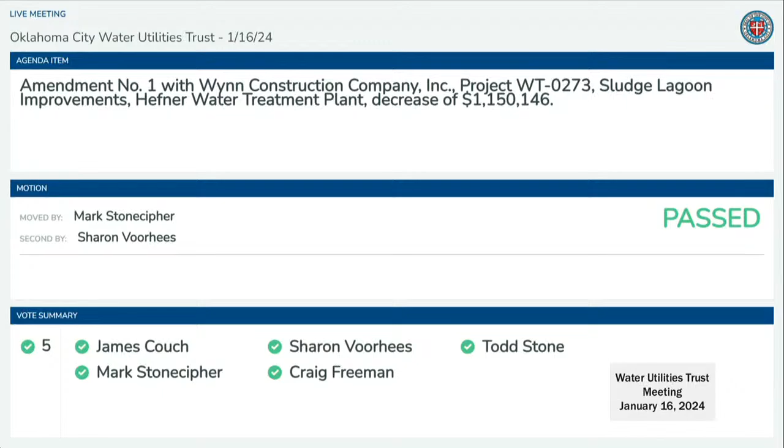You bet. Is there a motion for the item? Motion is second, please vote. And it's approved. Items from trustees.

Anything this afternoon? I was noticing we gave the Tinker Air Force Base an Air Force license that's good until September 30, 2071. I don't know if I'll be around for the expiration of the license. That's a good thing. You've got to vote on it this time.

Okay, general manager reports. Mr. Chairman and trustees, we have 2 presentations. The first is by Joy Cote on South Canadian Wastewater Treatment Plant.

Okay, just kidding, skipped ahead. Good afternoon, Mr. Chairman and trustees. Like Mr. Weingart said, my name is Joy Cote, and I manage the wastewater treatment plant projects for the city's utilities department. So today's presentation is a quarterly update on what I consider to be our flagship project, but I am biased. It is the South Canadian Wastewater Treatment Plant Improvements Project.

A quick reminder of the drivers behind this project. The plant itself was first constructed in 1986, and our last major improvement took place in 2013. So many components of the equipment and the treatment process at the plant were nearing the end of their useful service lives and were in need of replacement. Amidst addressing these issues, we also wanted to increase the treatment capacity for the growth in that area, Southwest Oklahoma City / Moore, 159th and May area, as well as complying with some of our newer and more stringent requirements from the Department of Environmental Quality.

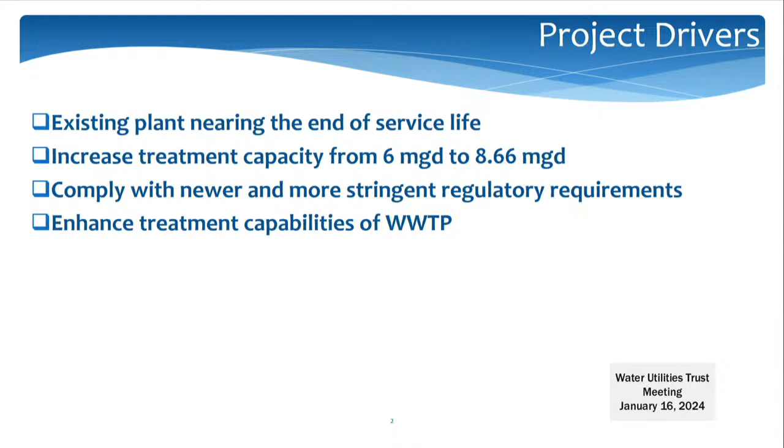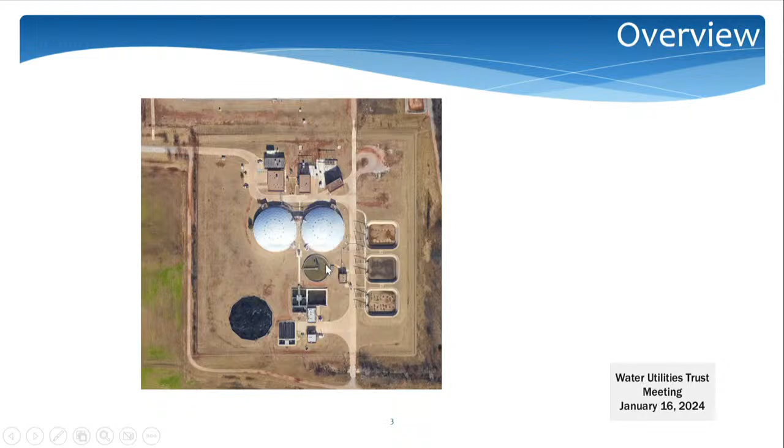At the same time, looking at what technologies were available, we wanted to enhance the treatment capabilities at the plant through this project as well. This graphic here is our existing plant. The two white structures here are our sequencing batch reactors. We have a clarifier and our 3 digesters, a relatively small facility. This graphic is taken from our plans, which was essentially building a brand new plant around our existing facility.

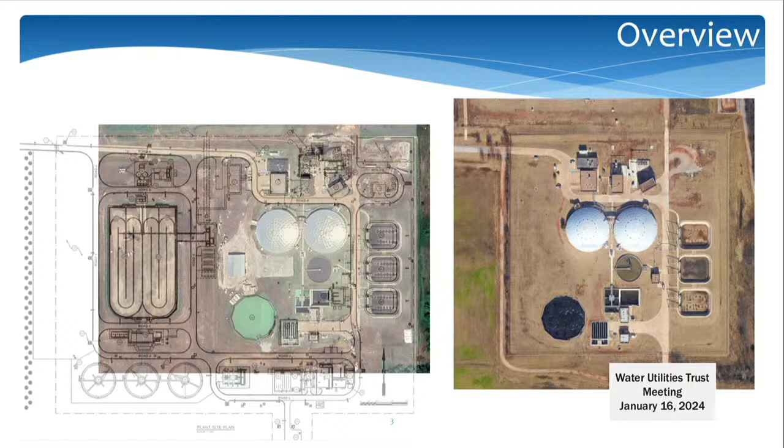Our smaller graphic to the left, underneath our plan sheet, shows the current state of the site, which has been ripped to shreds as we are getting a lot of these structures out of the ground. It looks ugly right now, but the progress is there, and we're very excited about it.

Our duration is 1,645 calendar days. Our project award took place in July of 2022, and our notice to proceed a month later.

We have two major milestones for this job. The first, phase one, is where we bring in our new treatment process and all of the equipment, get it commissioned, starting up and operating. Our second, phase two deadline, is final completion for the project, which is demolishing some of the existing structures and cleaning everything up, making it look pretty.

So by the numbers, as of January 1st, we have approved roughly $57 million worth of payments on this job to Crossland and their subs, which is about 31% on the finances. And we are 498 days as of January 1st, or 513 days as of today into the project, which is just over 30% on time.

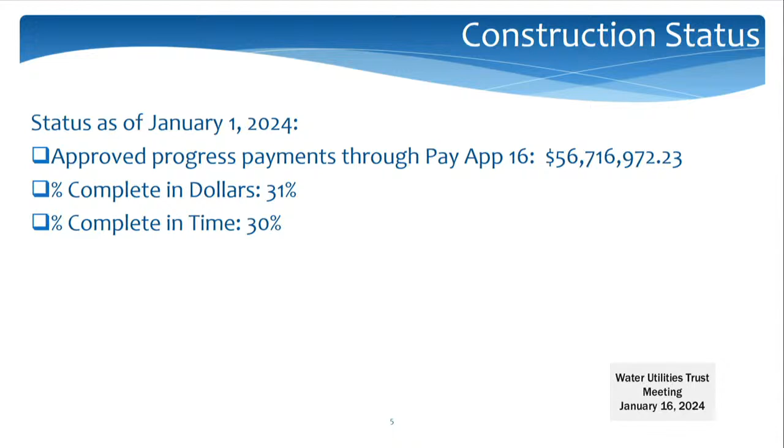With that, I'd like to show you a few photos on some of our major project areas where we've made progress in the last quarter.

First and foremost, our new administration building has a roof on it. Very excited about that. They're now working, especially with the weather going on, on some of the internal components such as the tornado shelter and lab facilities that will be inside this building.

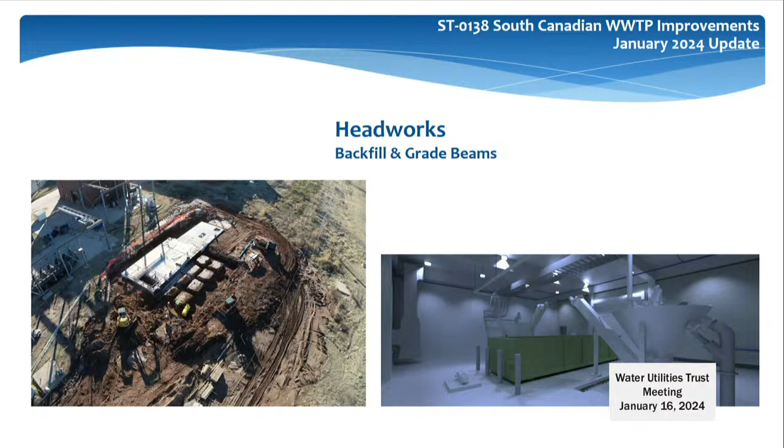Next is our headworks, our main structure where our raw influent wastewater comes in. We have worked on the underground channels, and all of the concrete work underground is complete. So we are now working on the foundation elements for the building above ground.

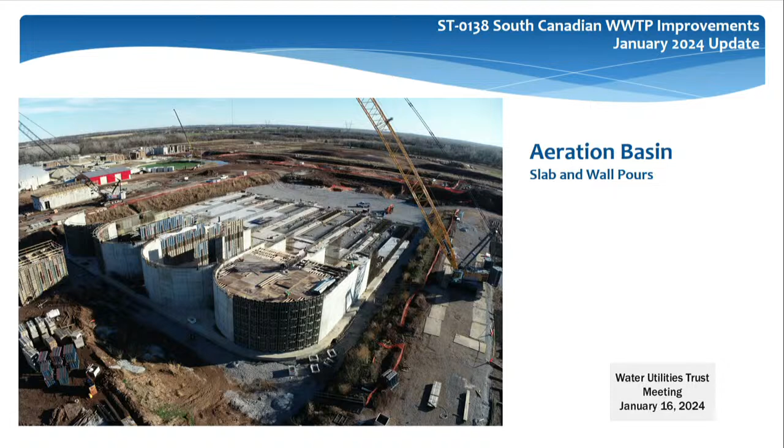This is kind of the hallmark of our project, definitely the biggest structure. This picture doesn't really do it justice, but we have two new extended aeration basins that are currently being fabricated and built on site. We've done a number of slab pours, and we are now actually pouring the walls for this. I have a picture towards the end that shows a little bit more perspective.

If we go to the southwest part of the site, we can now see some of our foundation elements for our clarifiers that are coming in, our very large settling tanks that are part of our new treatment process.

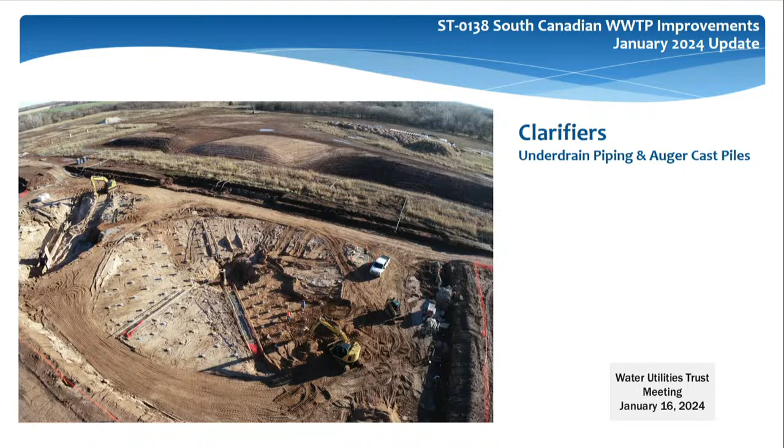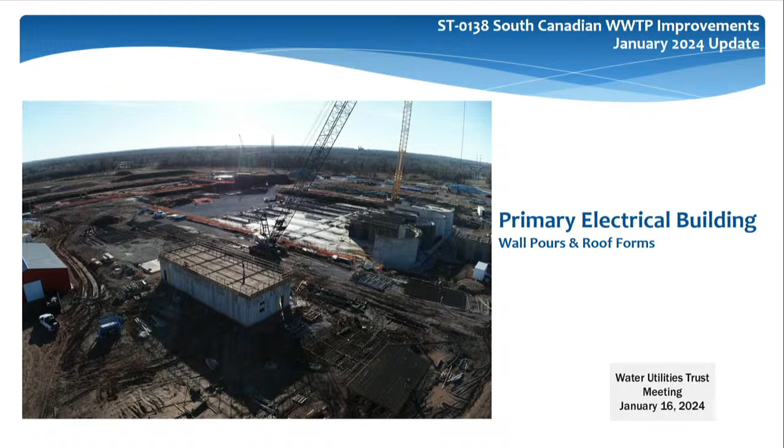Our primary electrical building, which essentially helps us control all the juice to all the buildings at the plant, we've completed all of the slabs, duct banks, and underground work. We are now working on walls and roof forms.

Our disinfection building is moving along quite nicely. We finished our underground piping and under-slab work. We are now working on columns and wall pours. This will help us with our new disinfection system, sodium hypochlorite, which is a fancy way of saying bleach, that will help us disinfect our effluent before we discharge into the river.

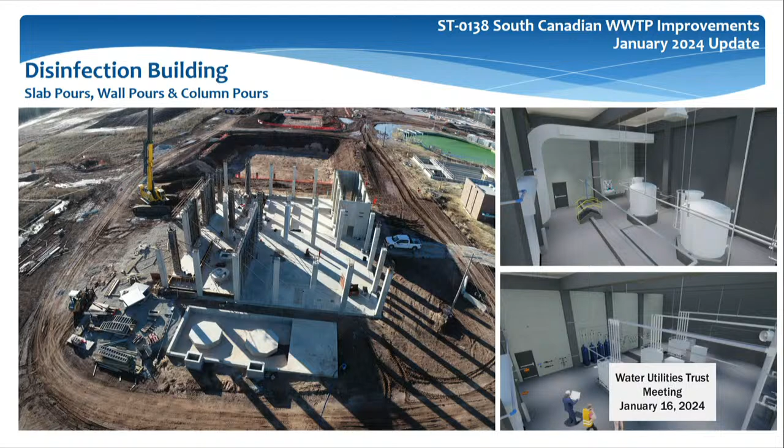Last but not least, towards the northeast part of the site, this is part of our solids handling process, the digester thickener building, which will help us mix chemicals with our sludge so we can dewater them and land apply them in the future.

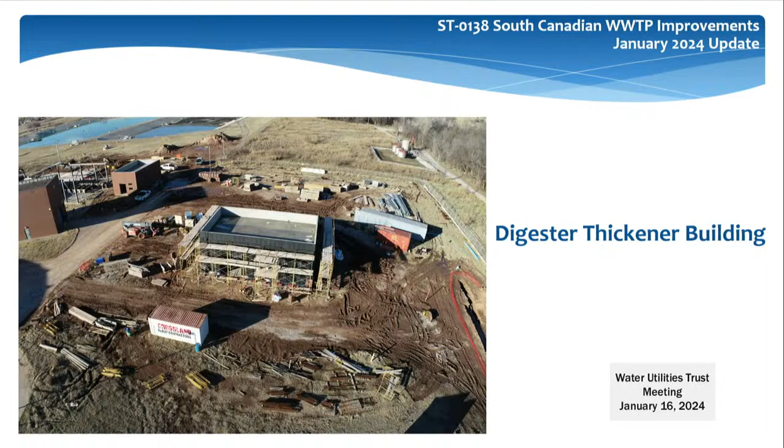This was our last photo, giving a little bit more perspective on the aeration basins. They are quite large. I very much encourage you to come out to the site.

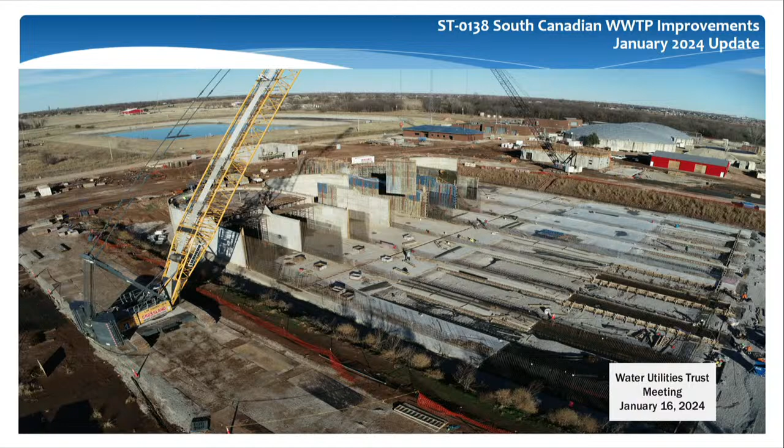Do you agree that the Atoka Pipeline is the premier construction project of the utilities? I agree that the Atoka Pipeline is the most important project undertaken by the city thus far.

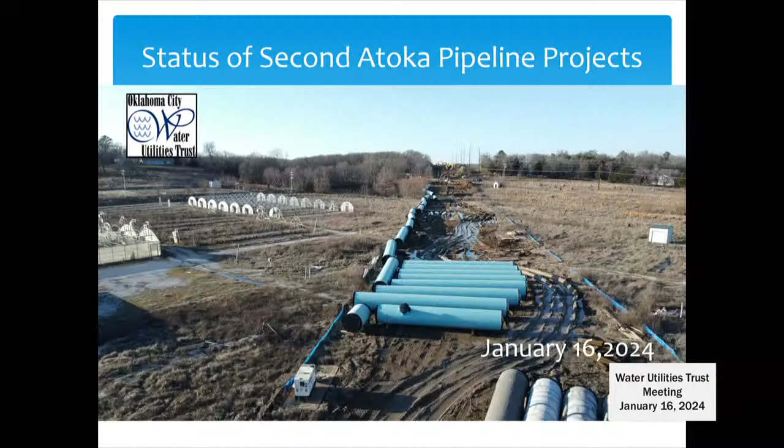Good afternoon, everybody. This will be a status update of the second Atoka Pipeline construction. What we see here is some brand new pipe being staged for construction. They're in the old Cedar Farm, just northwest of the Ada pump station.

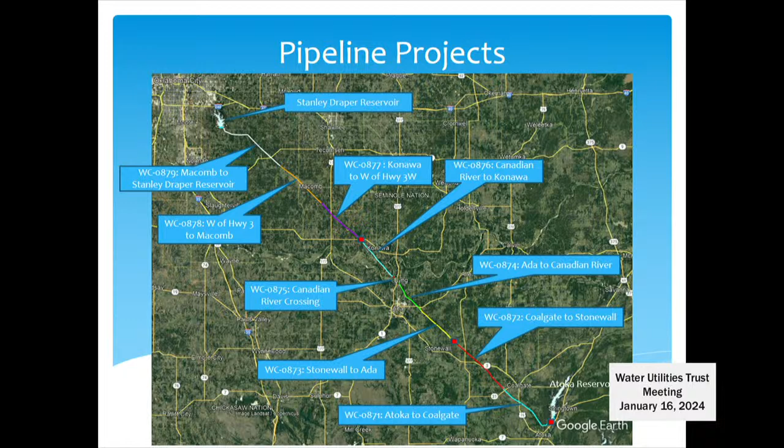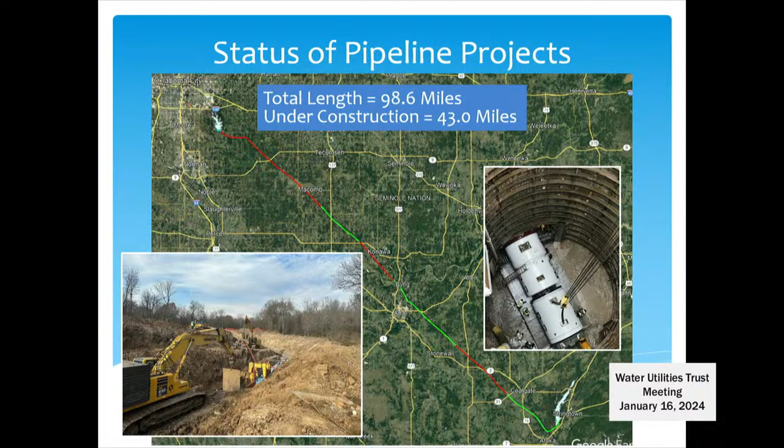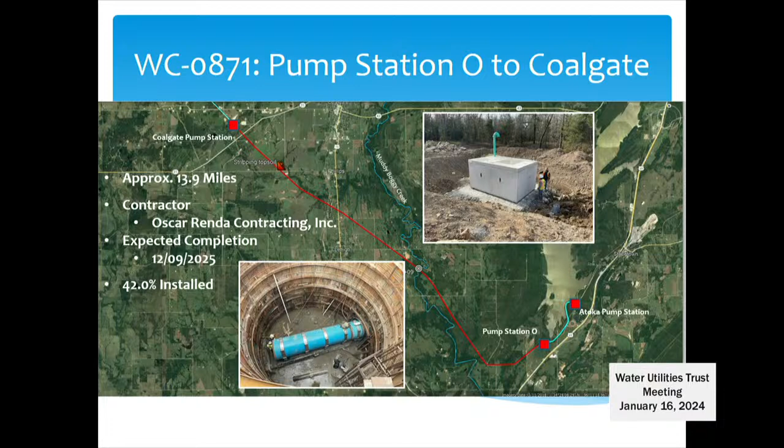As you can see, we broke up the whole project into 9 different segments to be done by different design engineers and different contractors. Out of the roughly 98 miles of pipeline, we have almost half of it under construction right now. The first part, from Pump Station O to the Coalgate Pump Station, is about 14 miles long. The contractor is Oscar Renda. We're about 42% of the pipe installed, and we're looking at an estimated completion of about December of next year.

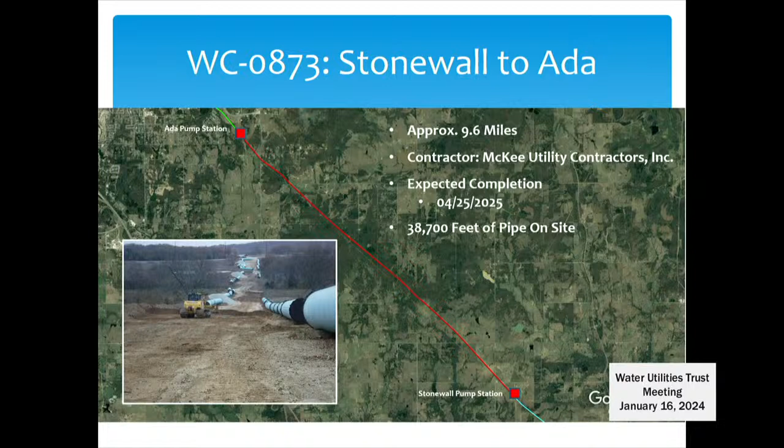Next is the Stonewall to Ada segment shown in red. Construction has not started on this one. McKee is wrapping up construction on another project and will begin this one hopefully by the end of February, beginning of March. Currently, we have about 38,000 feet of pipe laid out, ready to be put into the ground.

The McKee construction project from Ada to the river crossing is almost complete. Here we have 77.9% installed, but they're running like gangbusters, and pretty soon they will be in a position to hook into the connection at the river being done by Vadnais.

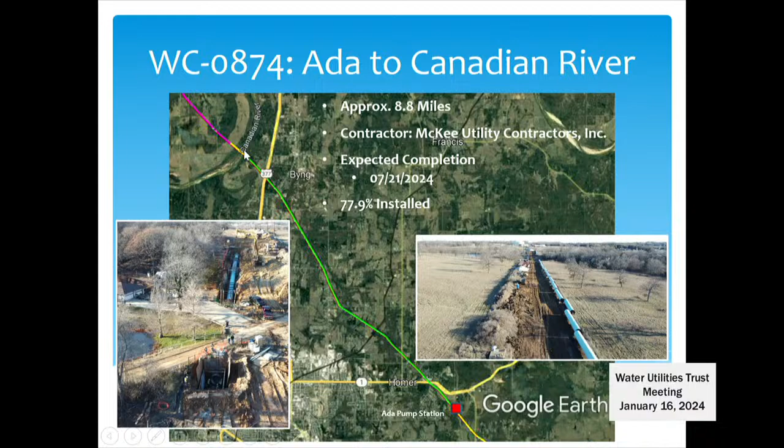And speaking of which, they are almost complete. They have bored both tunnels underneath the river, having installed all of the pipe, so they're putting in the valve vaults to provide the connection points for McKee to connect to in their project.

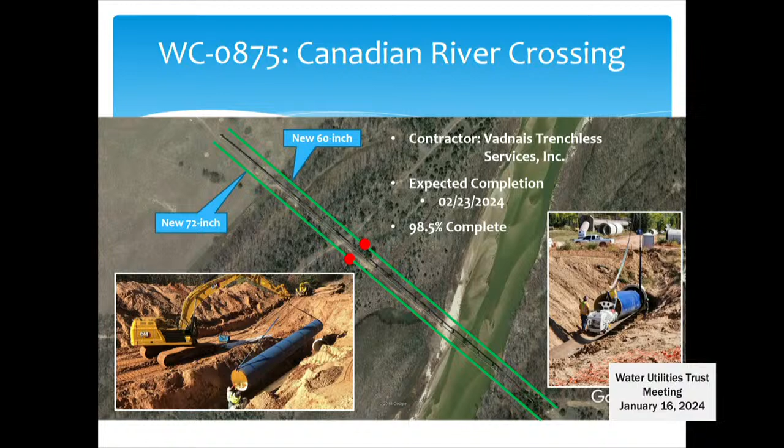The Konawa to just west of Highway 3 is also a McKee project. We expect that one to be completed in July of next year, and we're looking at pipe delivery to begin in March of this year.

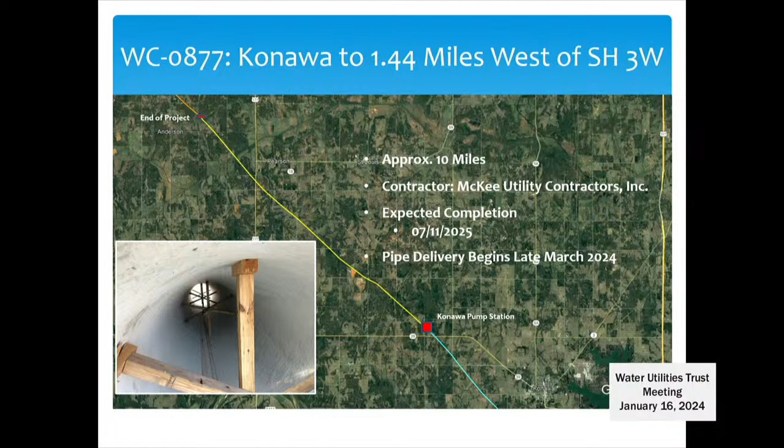Projects coming up will be the Pump Station O for this calendar year, on the south side of Atoka, as well as the segment from Coalgate to Stonewall and from the river crossing to the Konawa Pump Station.

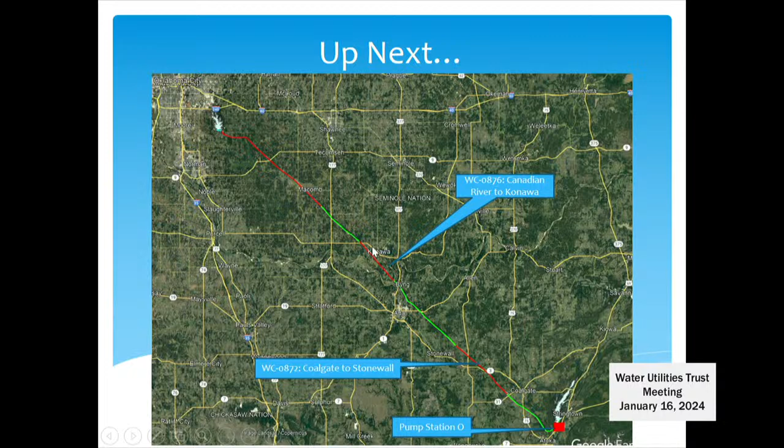Here is a picture of the Canadian River. There is the river crossing that we're going to abandon once McKee finishes up the connection that Vadnais is finishing up at the moment. And I will take any questions you may have.

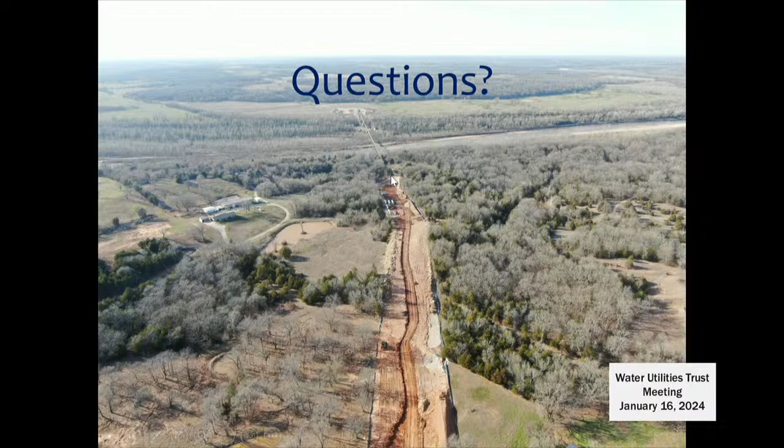Do you have any questions for Larry on the pipeline? Yeah, just one question. Does the pipeline tie into Draper, or is it just going to the water processing plant? It will go to both of them. Okay, yes. Thank you. You're welcome.

Generally, the water goes into Draper, but you'll have an option here to be able to take the water and put it directly into the plant. Correct.

Other questions? Thank you, Larry. You're welcome.

Anything else, Mr. Weingart? So, as we all know, we've had some cold weather, and we have a few larger main breaks that we've had to work over the weekend. We expect to see some more as the weather warms up a little bit, but we'll be on them and getting them repaired as quickly as possible.

We also went to a new billing system over the weekend, so everybody's been very busy. And we just opened up the portal, and our customer statistics on serving our customers is better than expected.